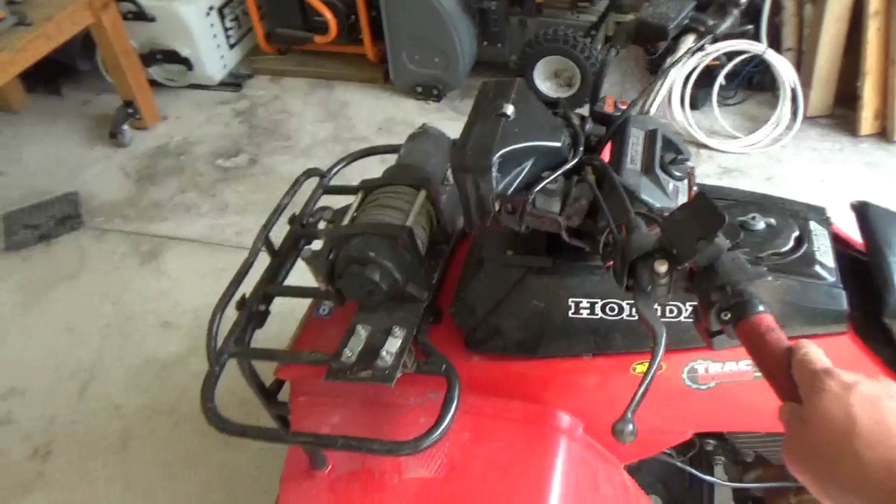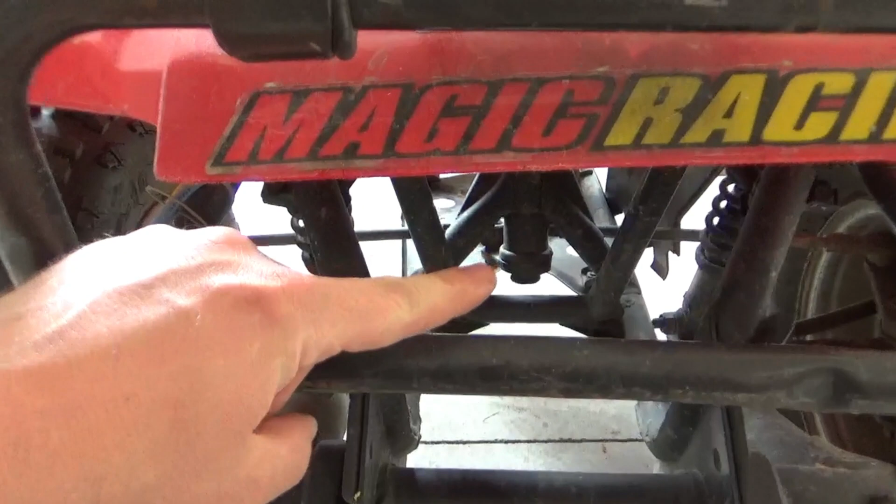Alright guys, we have a 1985 Honda TRX250 and it's got slop in the steering. Let me show you what I think it's coming from. Right there is the bottom of the steering column. If I wiggle the steering wheels for you, it seems to me like there's play in there.

The 1986 and newer show a traditional bearing in there. This 1985, the drawings I can find online, I don't know if it shows like a cone and cup bearing, but you can buy the balls for it. I'm hoping we can get this all out and find a bearing that would fit both those outside and inside dimensions. So let's get to work pulling it out.

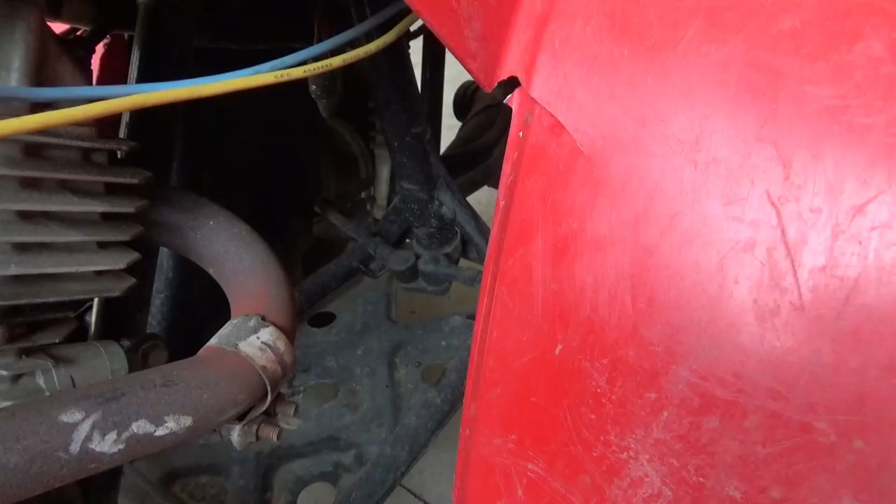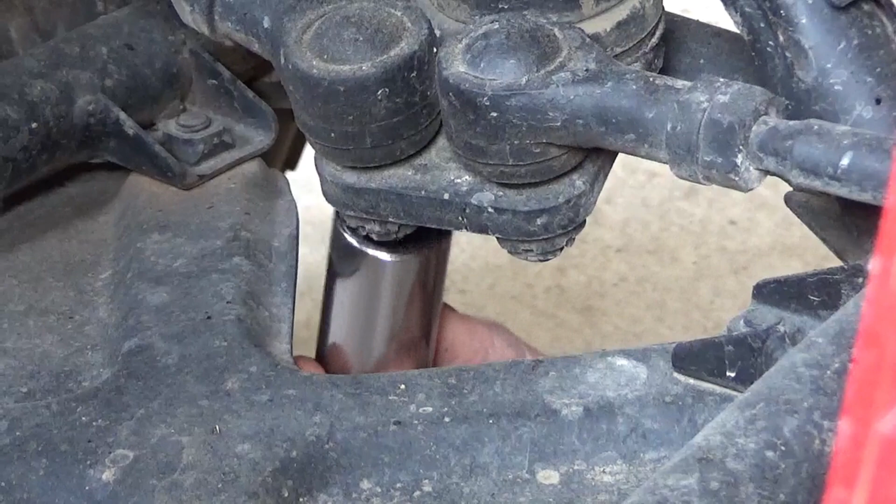Okay, I think we should start at the bottom and work our way up, and that starts with taking these, what do you call those things? Tie rods. They got a cotter pin in them. What size do you think those are? 12 millimeter? They are 17. Oh. Those are just spinning, aren't they? Try an impact.

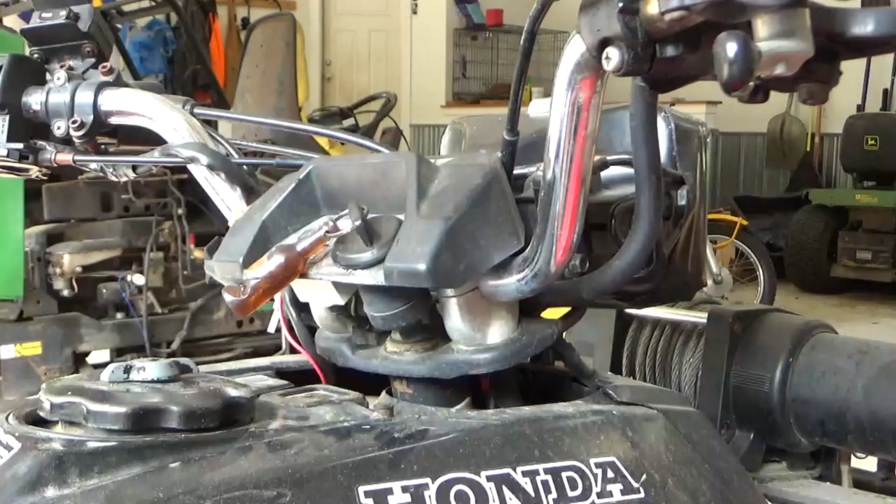Yeah, with those off now, I can feel the play in that. So I think we're heading in the right direction. Alright, so moving further up the steering column, we ultimately want to get to that castle nut there, so we got to take off the handlebars to get to that guy.

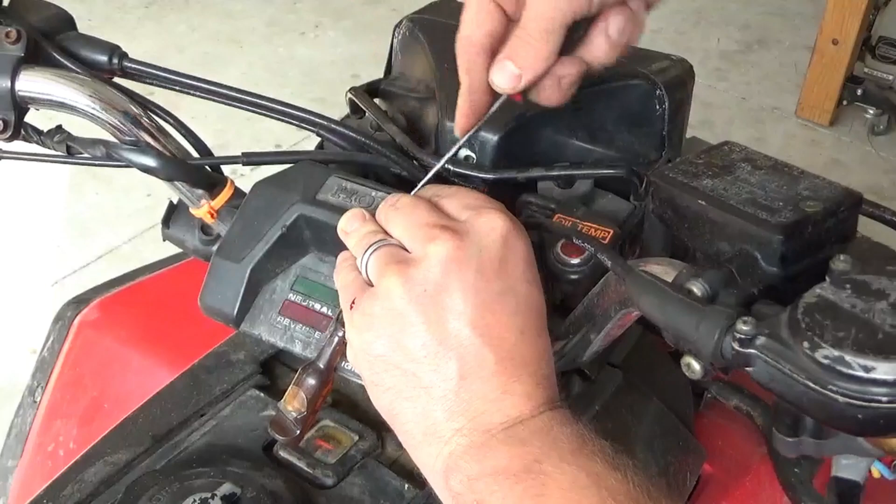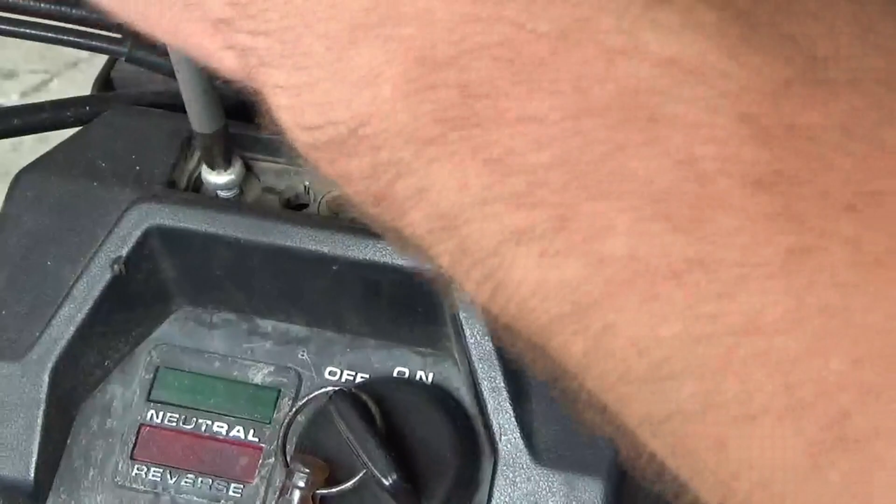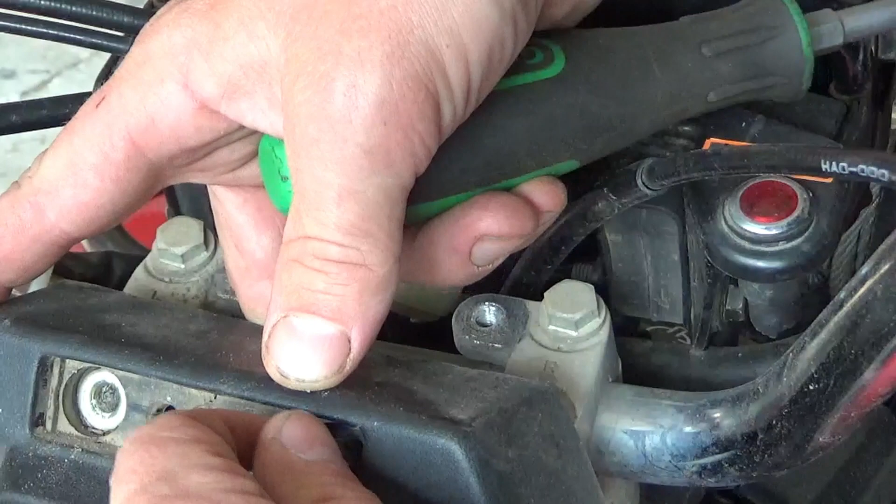And I think we got to get this dash off. I don't think it just pops off, it is attached. Let's see if this comes off. We got some JIS bolts. I'm thinking this, yep, there it goes, that whole dash will come out, which we don't have to disconnect any of these wires to the ignition switch or anything, we just want to get it out of the way. But we will take all this hardware with it so it doesn't disappear.

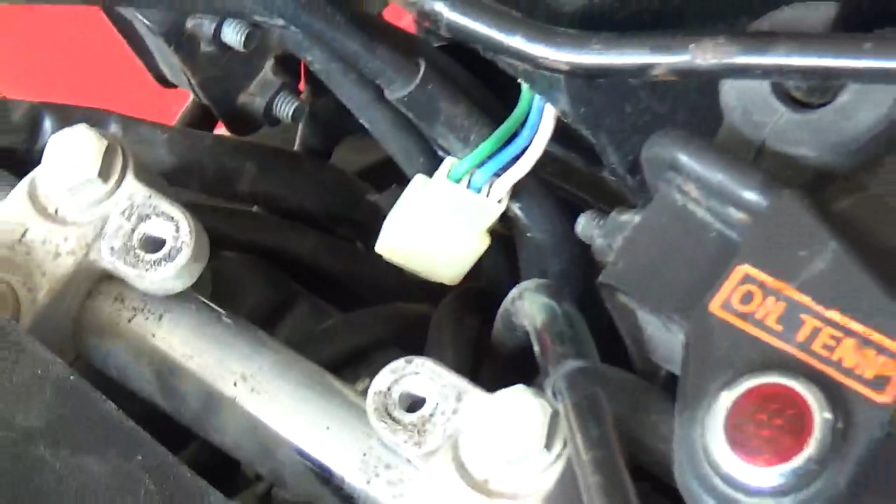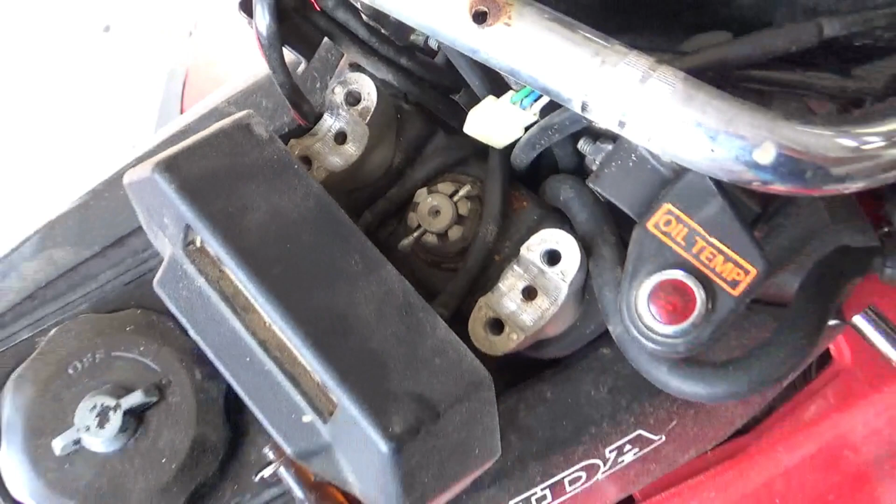And that's what we were after, is these. That'll allow us to take the handlebars off. Okay, again, we don't have to detach everything from the handlebars. We just want to be able to swing it out of the way, which we leave them forward like that. Right, gives us perfect access to that castle nut. And really, if there's nothing else holding onto that steering column, that should slide right out the bottom. So let's get that cotter pin out.

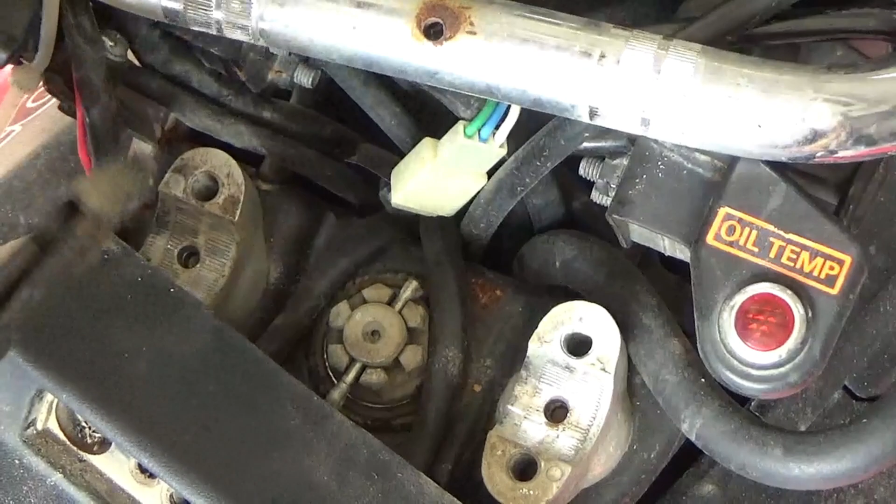Don't mind the screaming in the background. It's either a goat or the children playing.

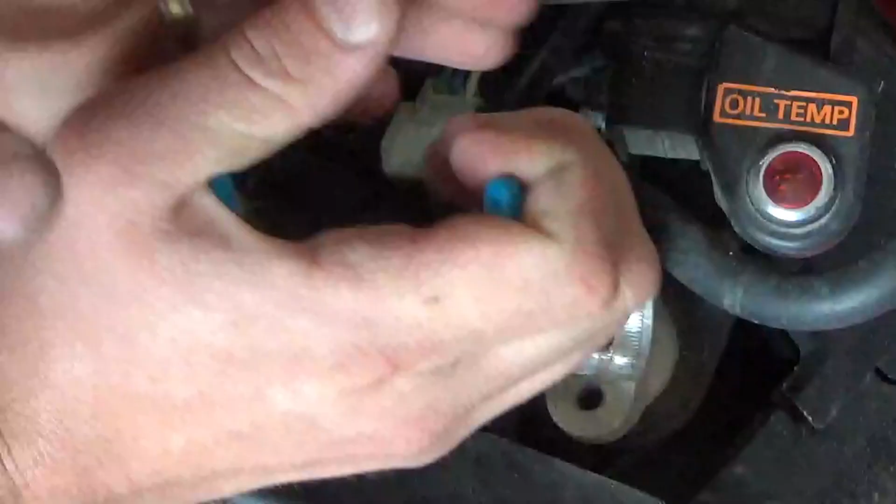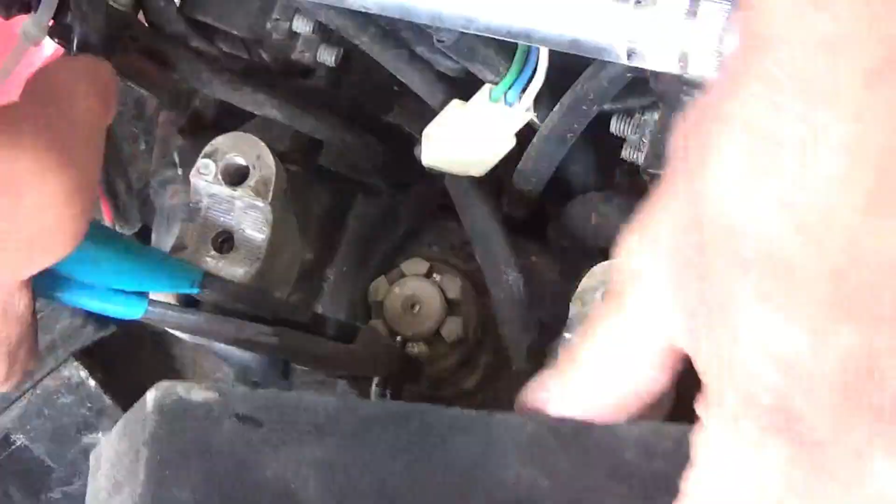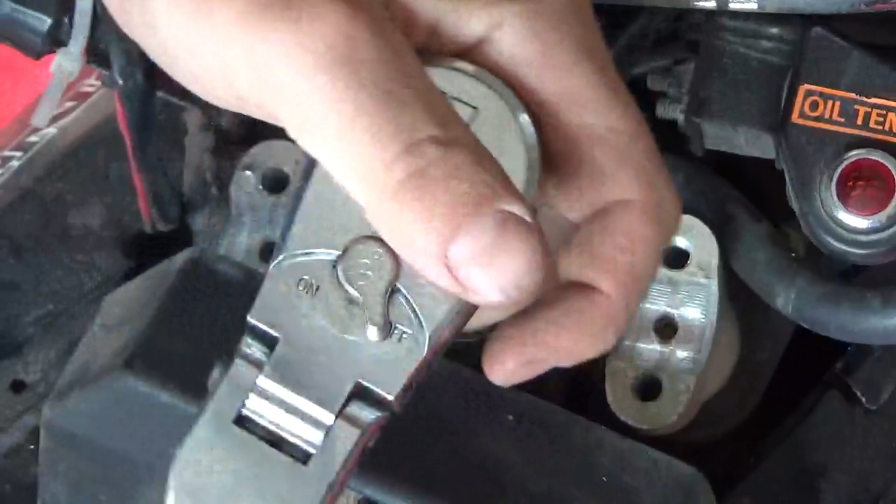Oh, come on. Come on, forget it. There you go. What size do you think that is? Big one? Well, if you guessed 24 millimeter, you are correct. Guess what? Oh, no, it's not. I thought it was spinning on us, but it's not. Look at that castle nut. Looks like there's a washer there too, but...

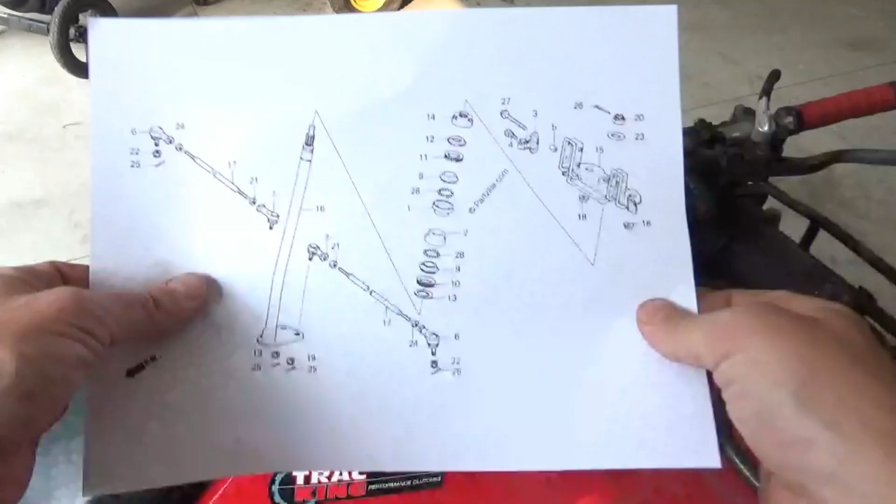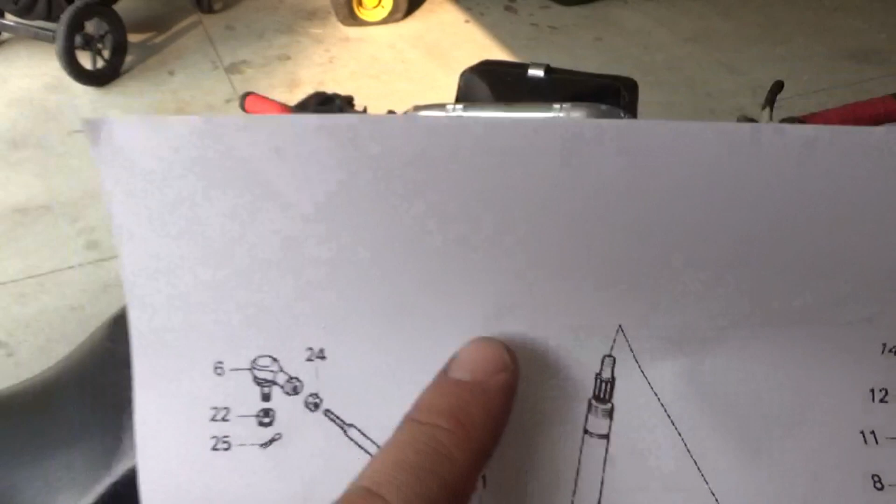Okay, so looking at the parts diagram, actually, I can see there is threads on there. That tooth part is what your carriage rides on. So that does have to pop off of there. And it looks like there is a locking nut on top as well. So deeper we go.

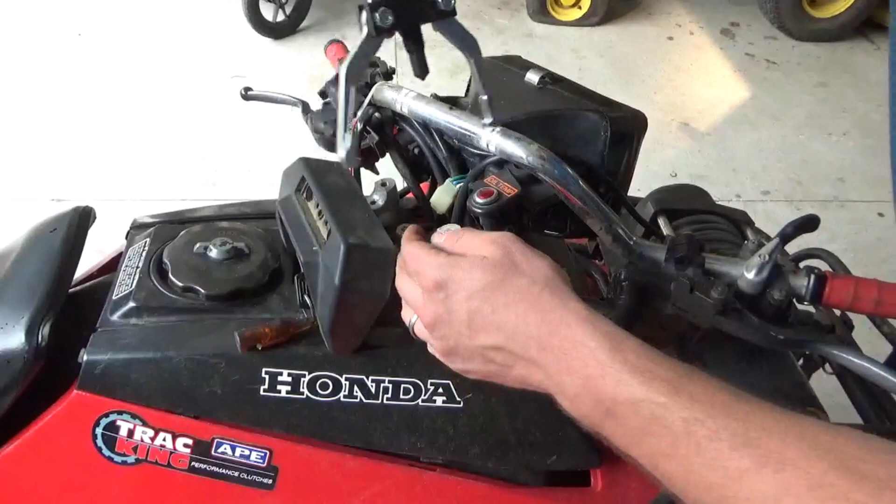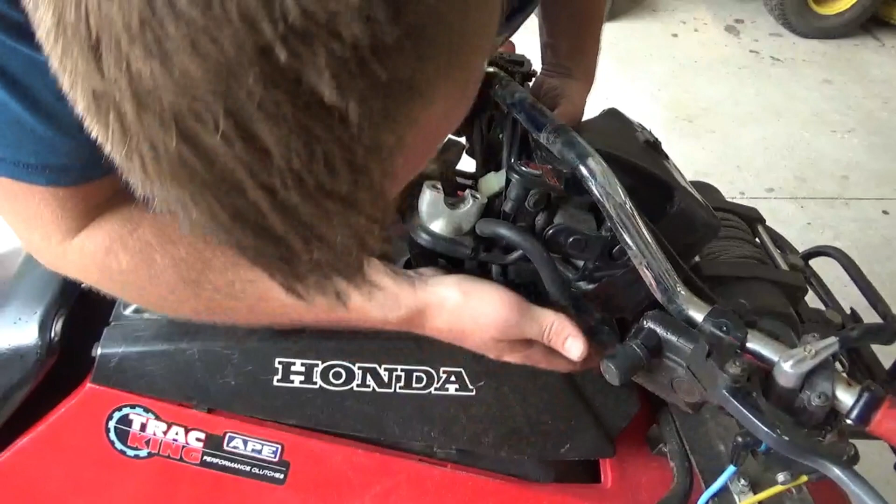Alright, so I finagled up a puller here. And if I can get one in the front and one in the back. I'll do that without pinching any cords, any wires. There. There's that little thrust washer that we were talking about. Can I get all this off to the side? Yeah. Nice. That wasn't too bad. I probably didn't even need the pullers for that.

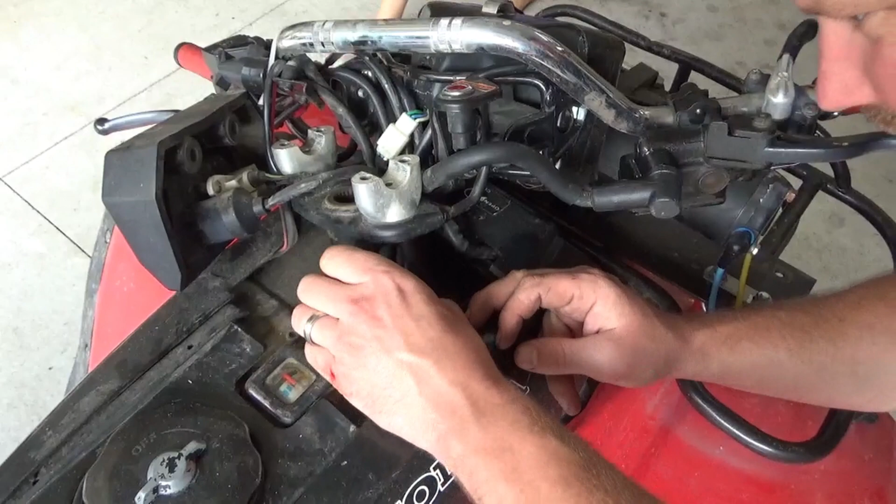Alright, now this. Is that turning? Oh yeah, that's turning off. Note to self, none of that was on very tightly. Probably because that bottom, oh, and there goes the steering column. That just dropped down in there. Let's see if it's catching on to that. Yeah.

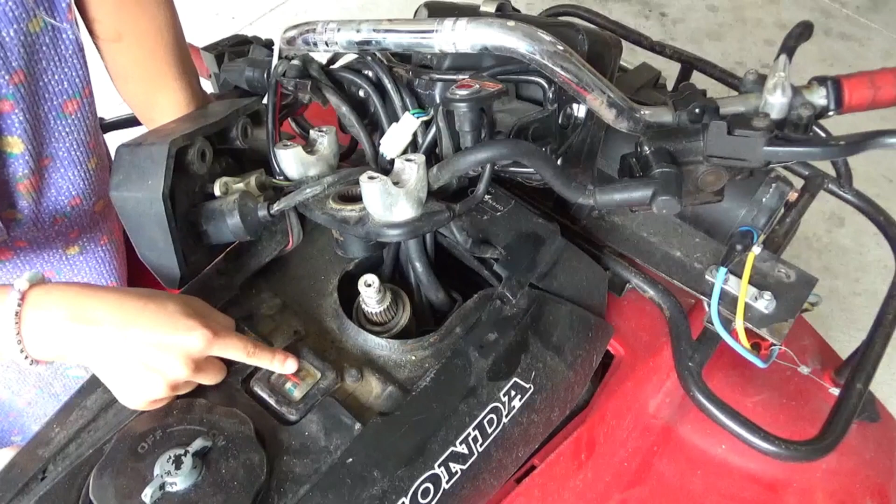Daddy? Yes, baby. What's this swervy thing right here? That's your gas tank.

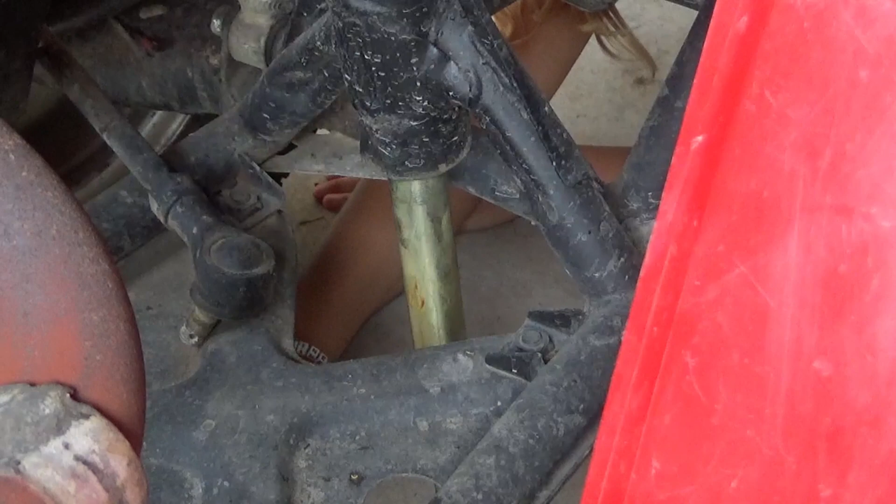We might have to jack up the front of this. Hey. Oh yeah, there's some balls. Oh, and there they all go. There's all the balls. I'll get them. I see them too. Goodness, they look like babies. Yeah, can you pick them all up? Sure. Well, we didn't lose any balls. Well, we lifted up this cup and we got them out. So there they is.

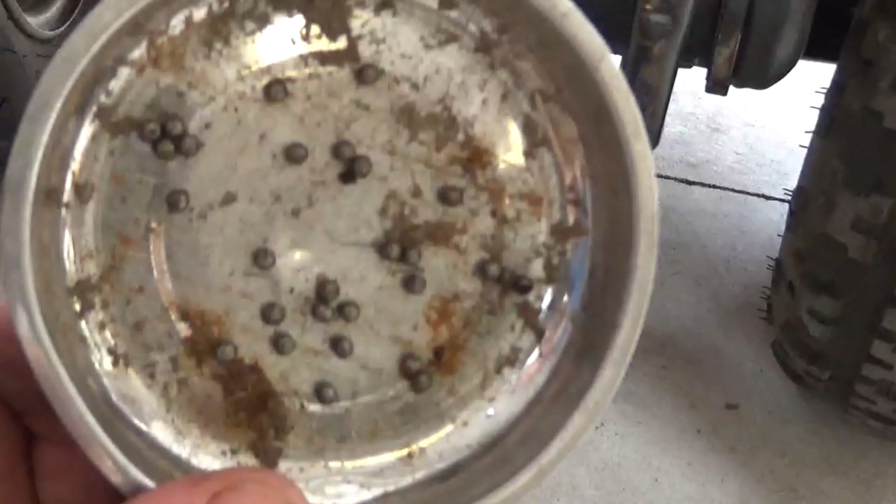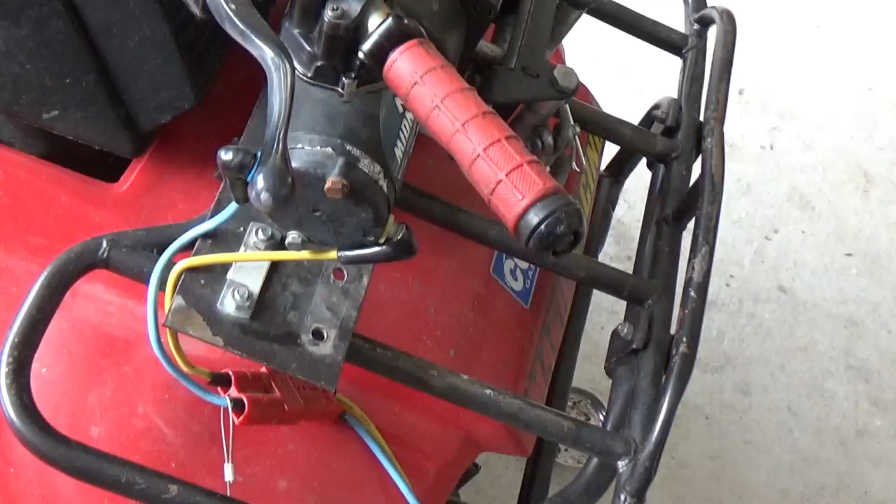I'm wondering if that looseness in the steering column, well, I mean, the grease is gone. I think the best thing to do is just pull that column all the way out and inspect those races to see if those are worn. Here's the top as well, so all those balls as well. And when I pulled this cup, I kept a couple of balls that stuck to it. So, yeah, let's jack up the quad and get that shaft out and inspect it.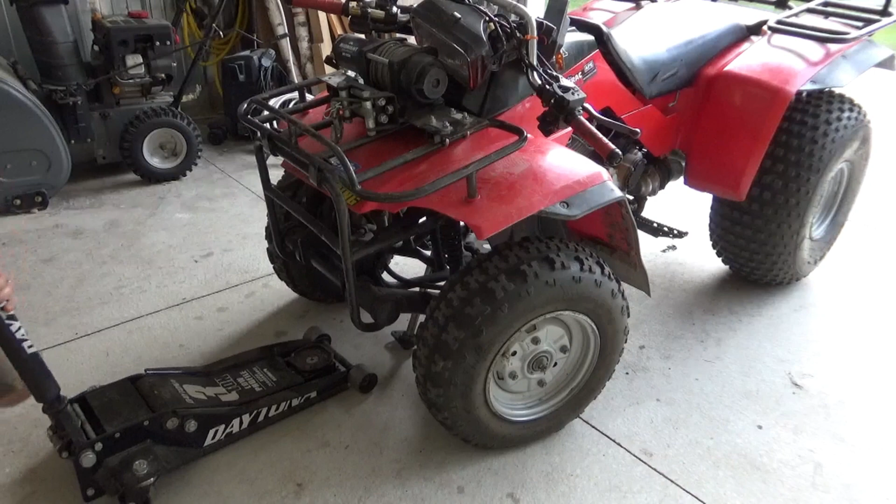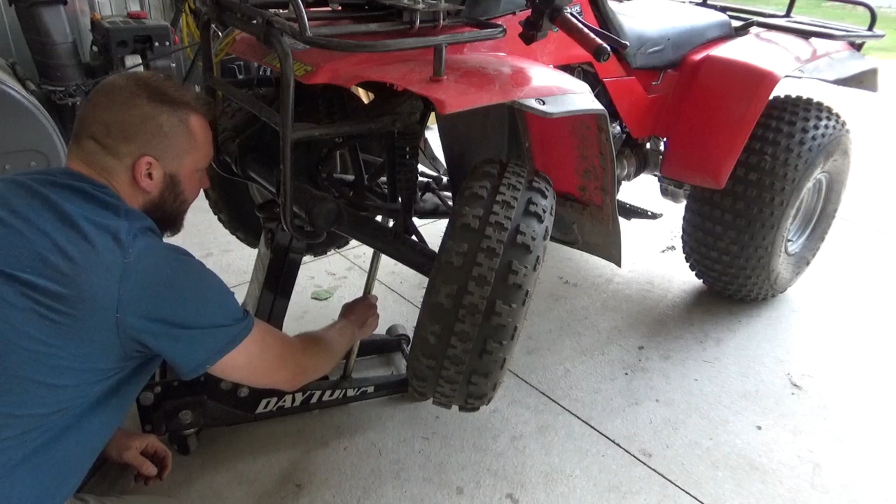I'll check. Ta-da! Put this down, Max, so no one gets killed. Yeah. Yeah.

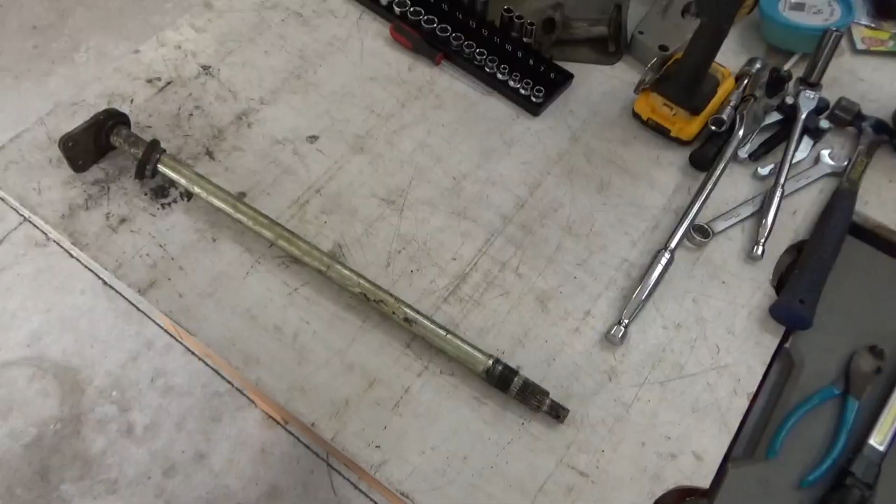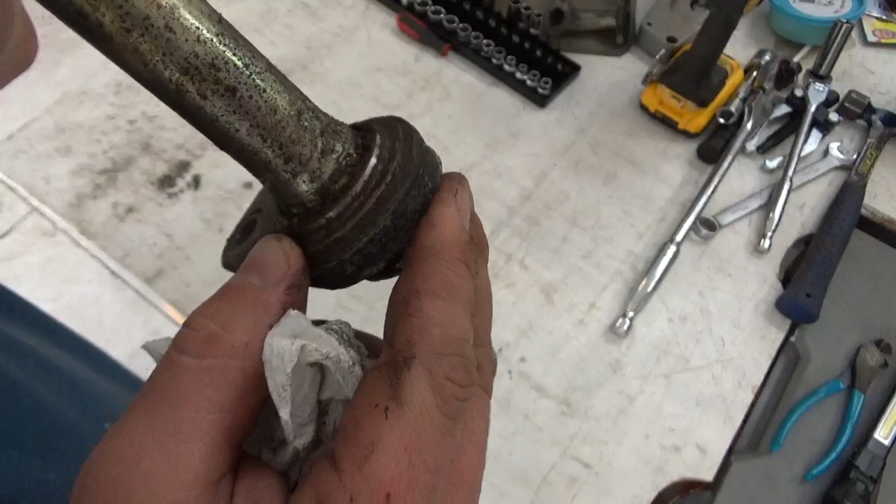Well, here's our shaft on the bench. They're wearing these cups. This one doesn't look bad in there. Yeah, how do you fix this back on? How? I mean, we can see the grease caked on there.

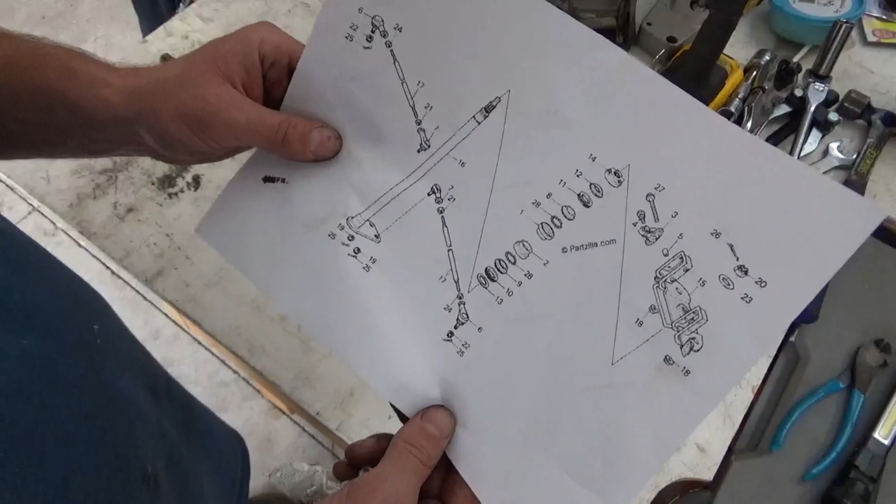Curious if we just look all this up, if these are still available, and just replace all of this so we know. I mean, these races and these balls cannot be that expensive. I wonder if that's the route we do. Let's look them up and see what we got.

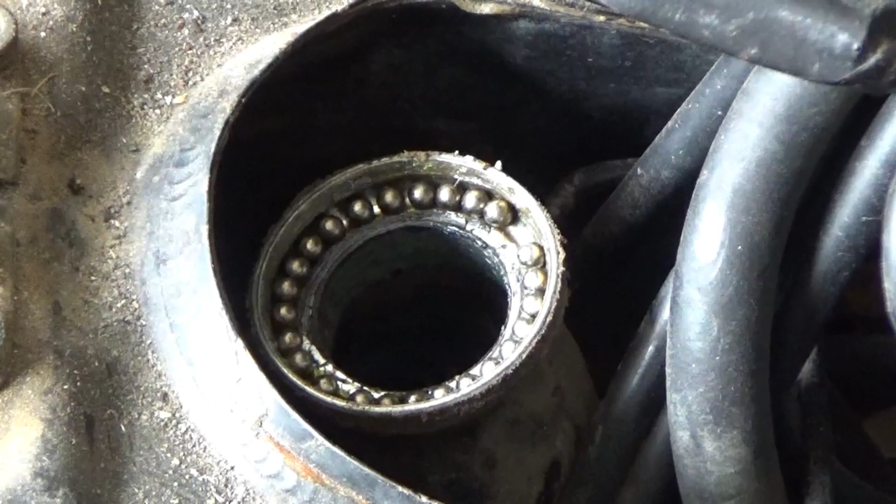So I guess before I go look for parts online, I should grab these balls out of here, because there's little children in the shop, and if those suckers get rolled away, we're gonna be in a hurry. So I got a greasy...

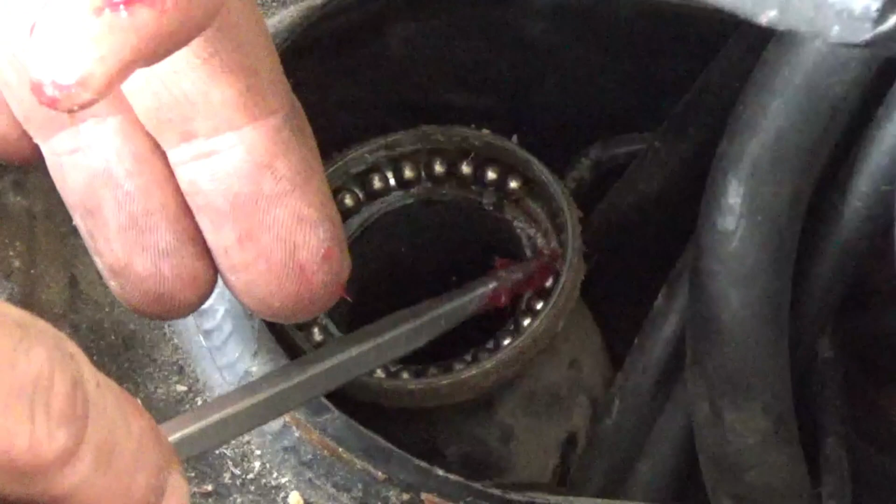Daddy? Yeah, bud. Can I tell you how we find it? Alright, so I'm using a grease on a flathead to grab these out. Why are you doing that stuff?

Okay, so got the old ball bearings. Got some new ones here. So these are supposed to be, the internet calls these out as 5/32nds. So I'm thinking let's clean these up and get some measurements off of them, and then see if they are worn.

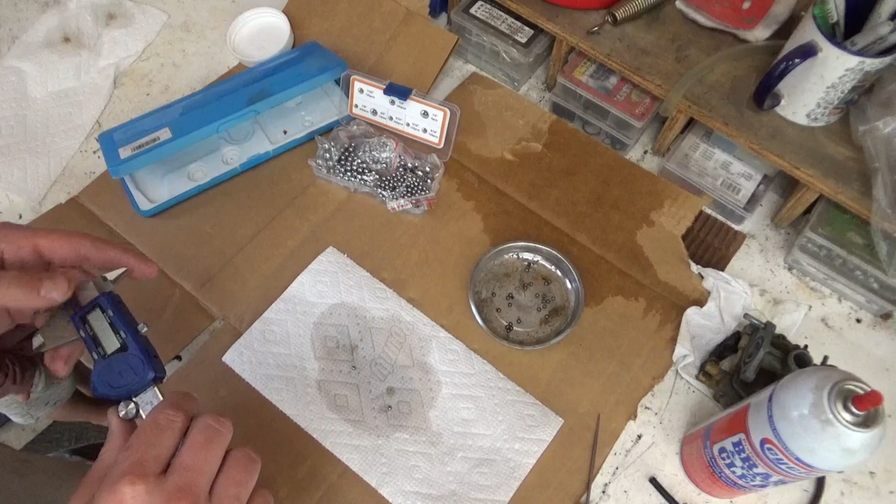Is that your measuring tool that you bought? Yep, it's my calipers. So real quick, what's 5/32nds? 5 divided by 32. It is 0.156. See what these come out to. 0.153. 0.152. Let's measure another one.

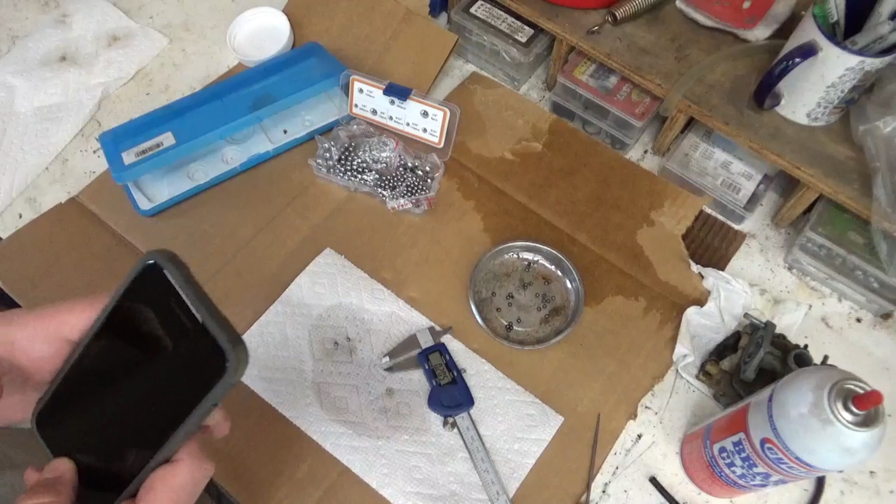0.152. I find it hard to believe that a Honda machine from 1985 uses the imperial system. What does 4mm come out to? 0.157 is what 4mm comes out to. So, according to that, we're off by almost 5 thou.

So if you're thinking about 5 thou, when you got a row of bearings around there, there's enough slop there to be 10 thou because there's a ring around it, right? Doesn't that make sense? So, what are these bad boys? Let's put these back so we don't get them mixed up.

What do these come out to? 155. So these must be our 5/32nds. Alright, so these are going to be the ones that we want. Got the right bag the first time. I got this cheap set from Amazon. I'm sure I'll never use the rest of them.

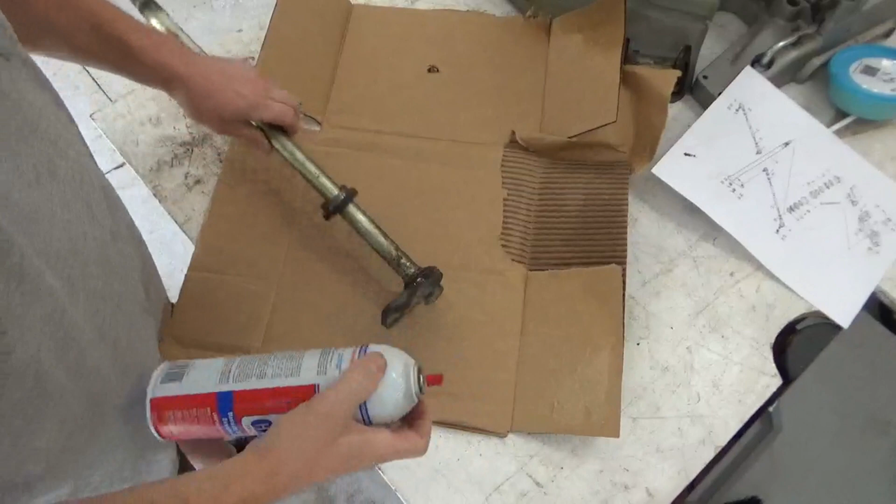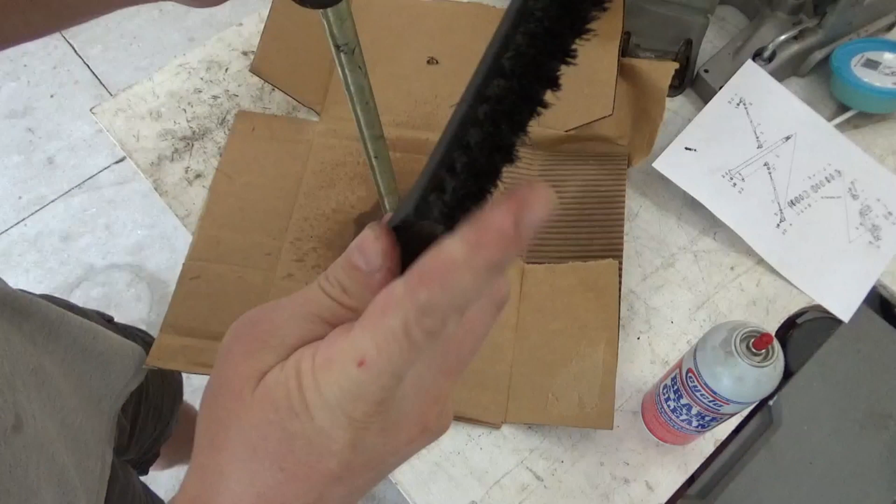Okay, let's go load this back up. Before we grease this back up and load it in there, let's clean up some of this old crusty grease. I just have a soft nylon brush that's not going to scratch anything. Everett, could you bring me some paper towel, please? Yeah.

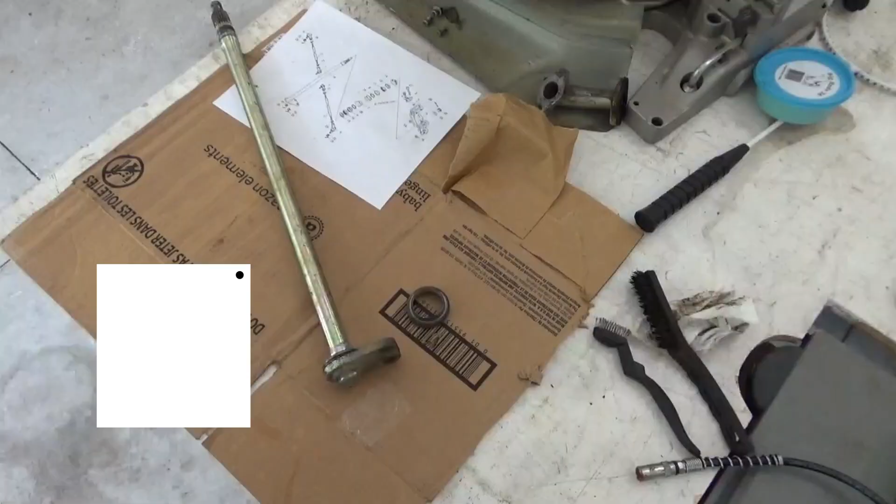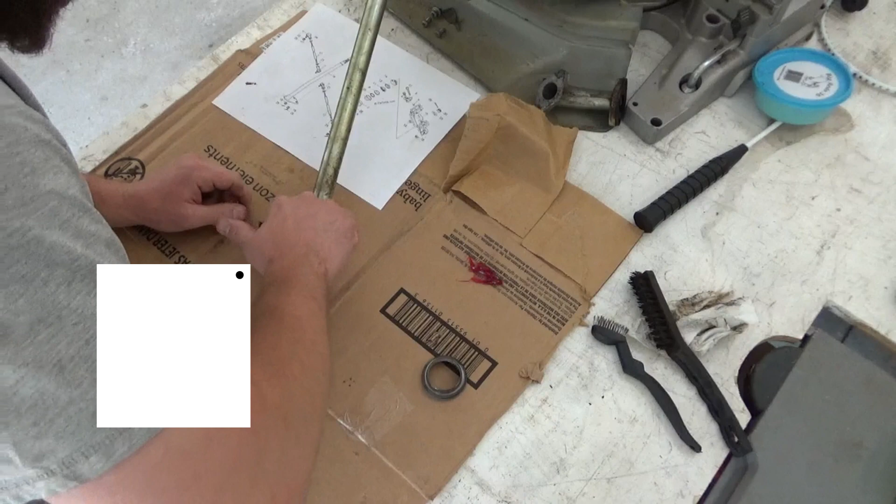Alright, I got those relatively cleaned up. Let's get a glob of grease. How do we want to do this? Let's get some grease on the race, and then we can go about placing them on there and then putting our cup on top.

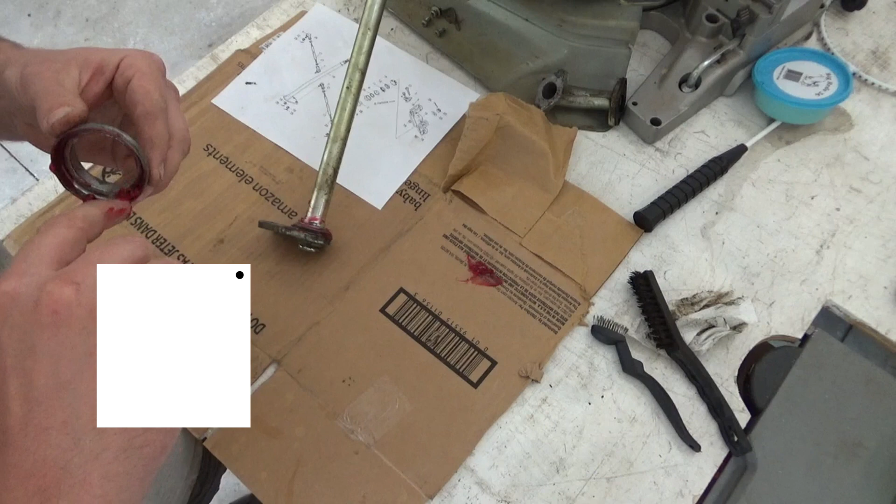I counted 28 ball bearings for the top and the bottom. We'll place them in there until we run out of room and see how many that is. I doubt that we lost any, but if we got 28 for top and bottom, we'll see what we come out to.

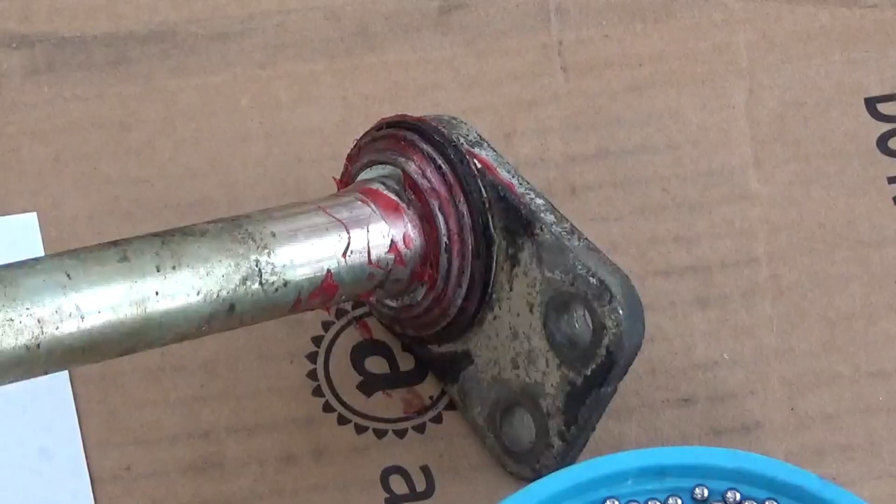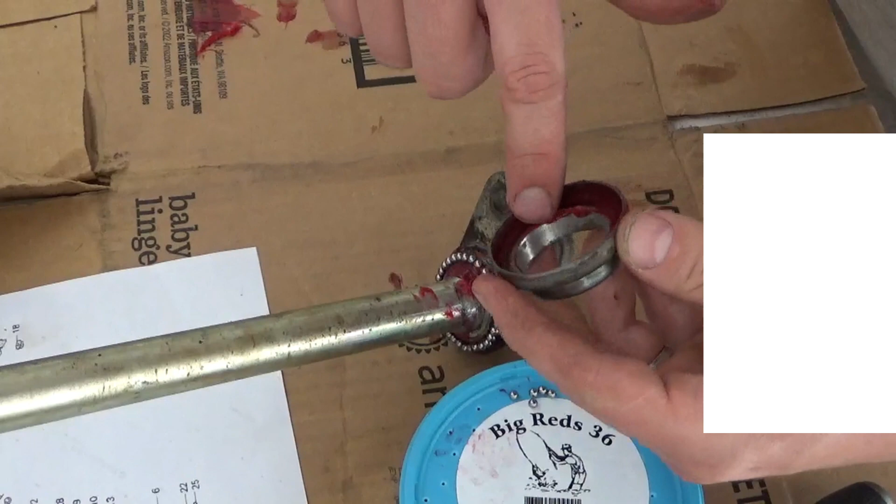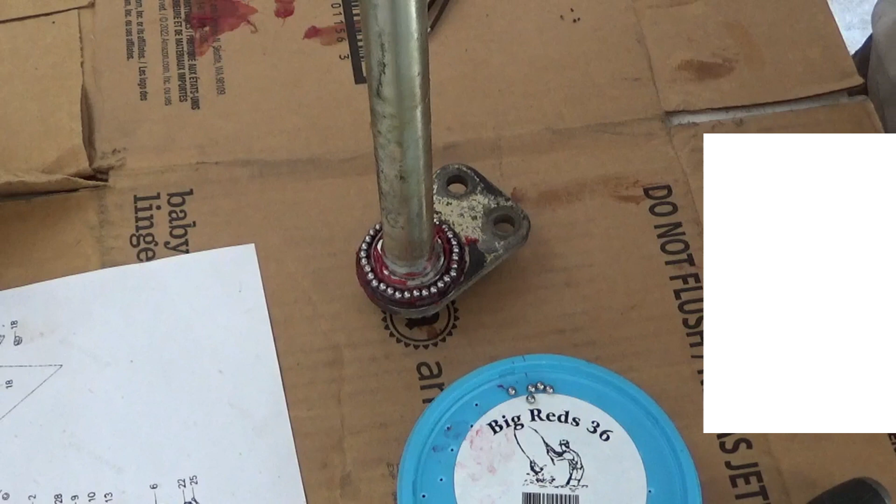There she is with all the bearings stuck on with grease. I'm just going to take a little grease, put it inside the race, or I say race, it's probably called a cup. I'm sure the internet will tell me what it's properly called. So let's slide down this race and get that all captured in there. Just like that.

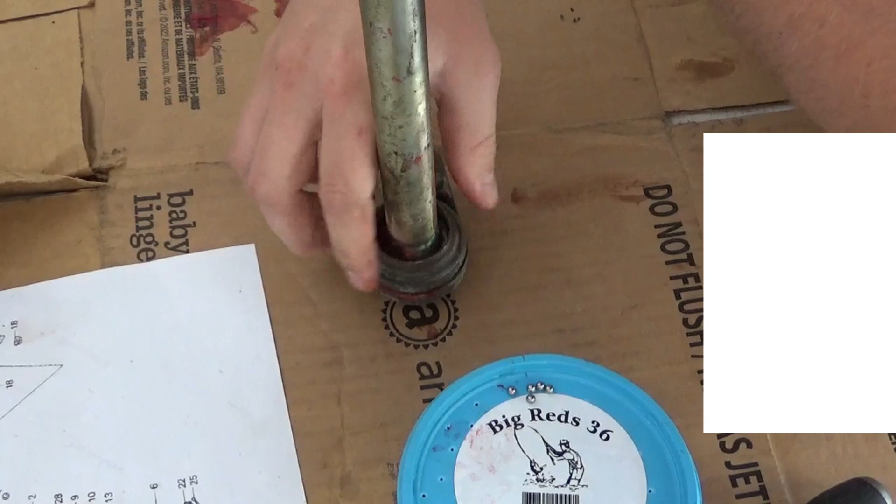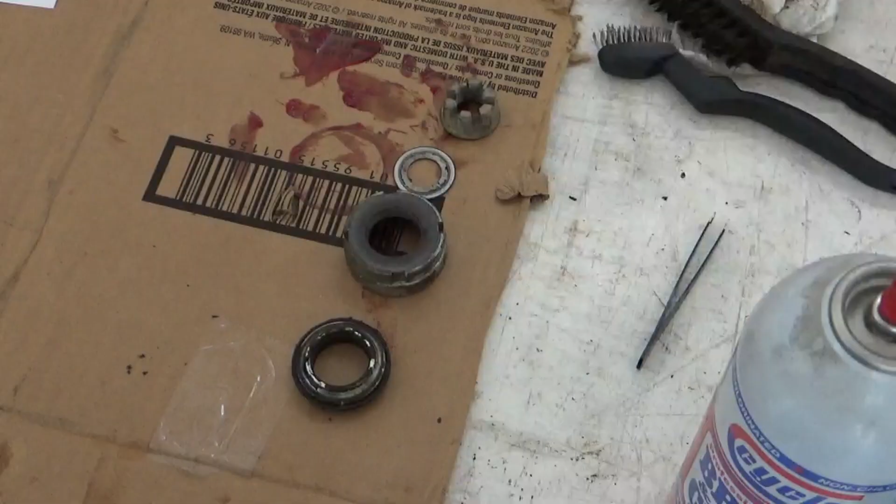Now we're ready to jack up the quad again and start reassembling this thing. I guess before we race into shoving that steering shaft back in, it would behoove us to clean up the top bearing, so that's all ready to go. Get some fresh grease on that, and then probably clean up that collar back on the quad and put bearings in there.

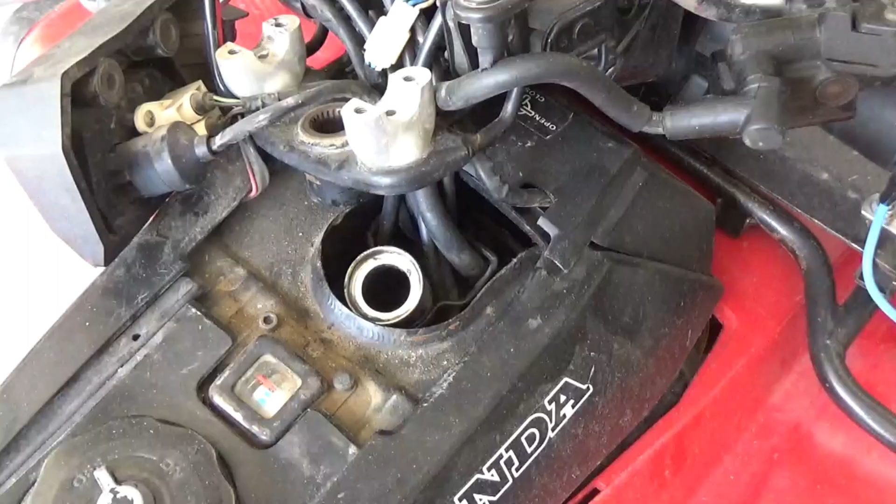Here's the cup that's back on the quad. This is relatively clean. I think we can put new grease in there and stack that full of ball bearings as well. So when we jack up the quad and put the steering shaft in, then we can just slap down the top race and the bolt, and we're ready to tighten it right up.

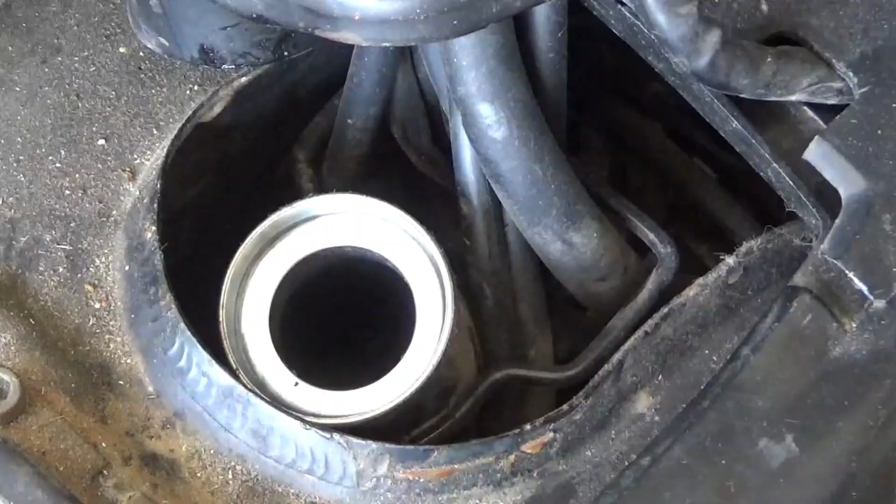My theory is more grease, more chance of it holding on to those balls better, right? Is it? Are you smelling what I'm stepping in?

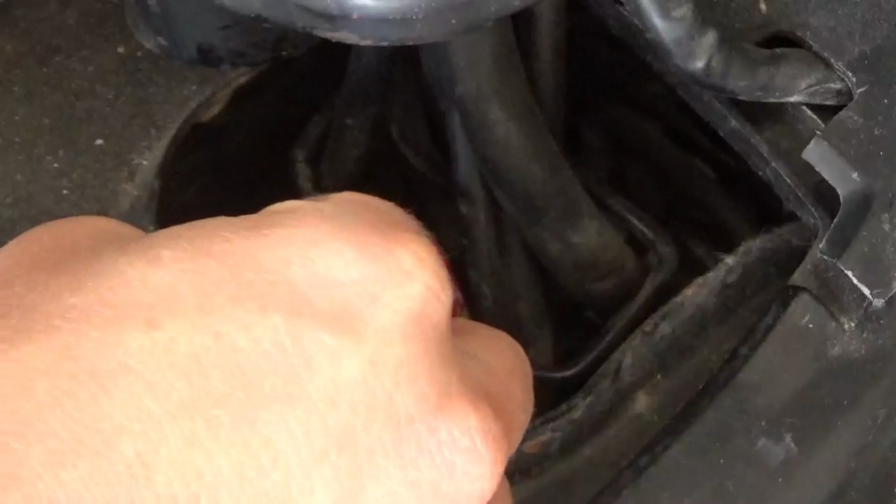You guys ever see the show The Reassembler with James May? I think it was on Netflix. Now this might be a long time ago, but it was called The Reassembler. What they would do is take something mechanical apart, and then James May, you would know him from Top Gear, would put it back together.

Part of that show was an old school mini bike. And I remember on that mini bike, it had a steering column just like this. James May would count out all his balls and put them in the grease. I remember seeing that thinking, man, that'd be really cool to do that. And now, look at me now, James May. I didn't think I'd be working on stuff this old that I'd be doing this with.

With this top cup, this will be easier to count how many balls we're fitting in there. Remember, we had 28 originally.

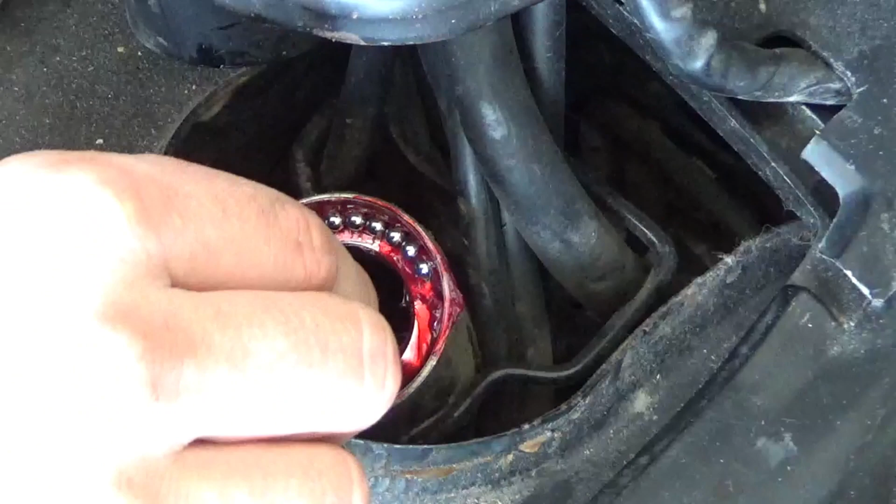Because these are a little bigger, are we going to fit less, or were all those original bearings worn out so much? Anyone know the original number? On the website, they want you to order 60 of them, which to me would mean 30 for the top and 30 for the bottom. So let's fill this all the way up, and then we can count them.

We think, can we get one more? Yeah, I think we can safely get one more. Oh. One, two, three, four, five, six, seven, 8, 9, 10... 25, 26, 27, 28. 28. 28 is the magic number.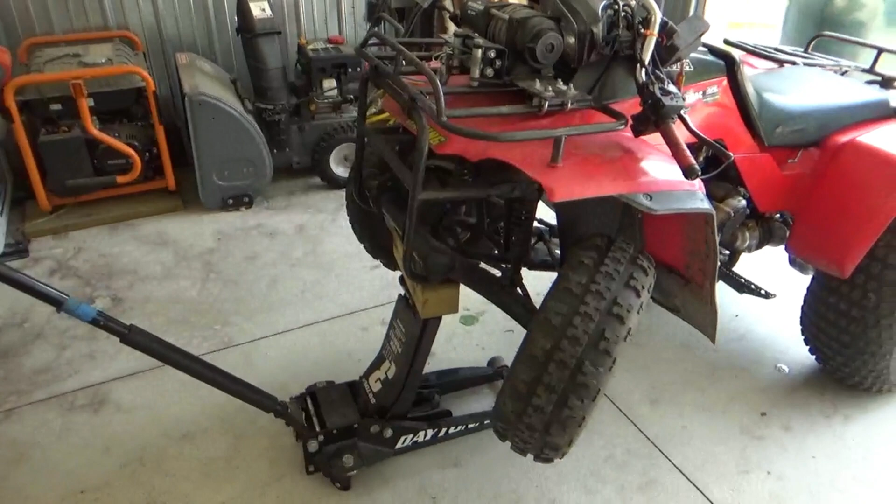He who does not use jack stand, become jack stand. Oh, this is so sketchy. What do you mean it's so sketchy? Let's let it down a little bit.

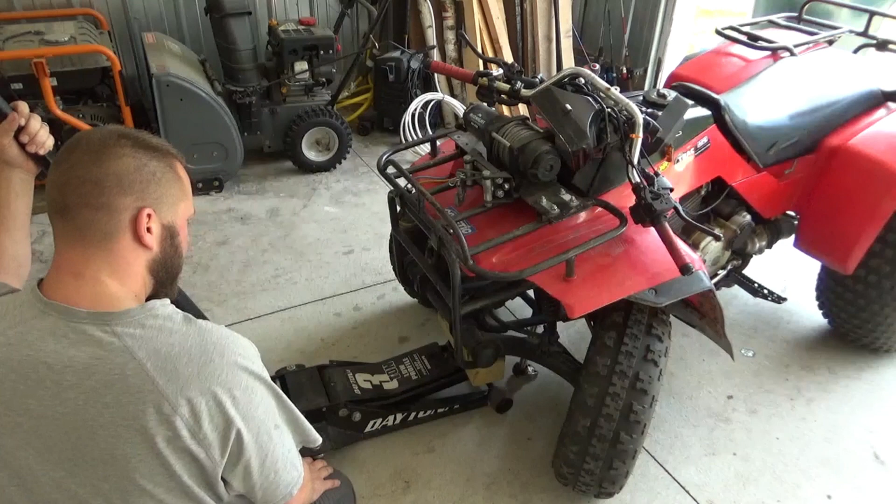Daddy, my hope is when you let it down, it doesn't roll down the hill. Daddy, my hope is when you roll it down, it doesn't go rolling down the hill. I hope it doesn't roll down the hill either, Everett. And that would be bad because your car's in the way. Bam, bam, boost, boost. All smashed up. Collins.

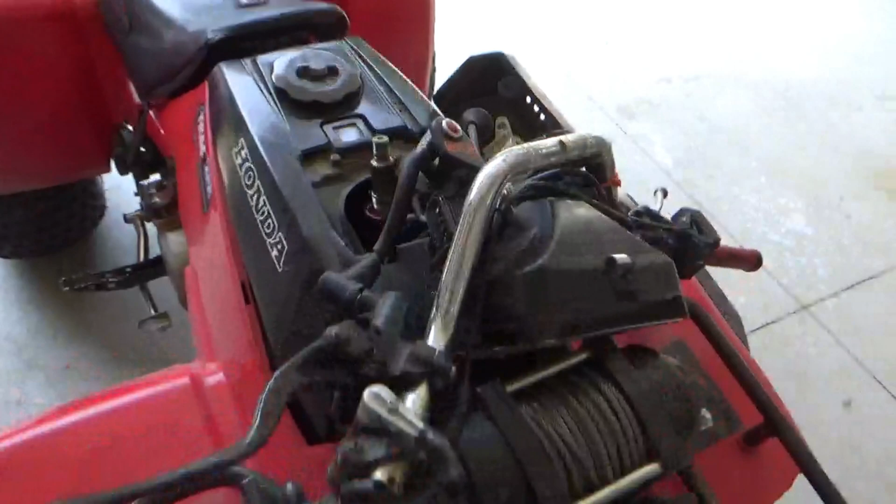Success! Okay, so after a little fumbling around, I'll show you my setup. We're propping that steering shaft up with a large socket on this jack. And that's keeping it up against the shaft there. So that will give us something to push against when we're setting our stuff on top. Okay, put our top race on. Our first nut.

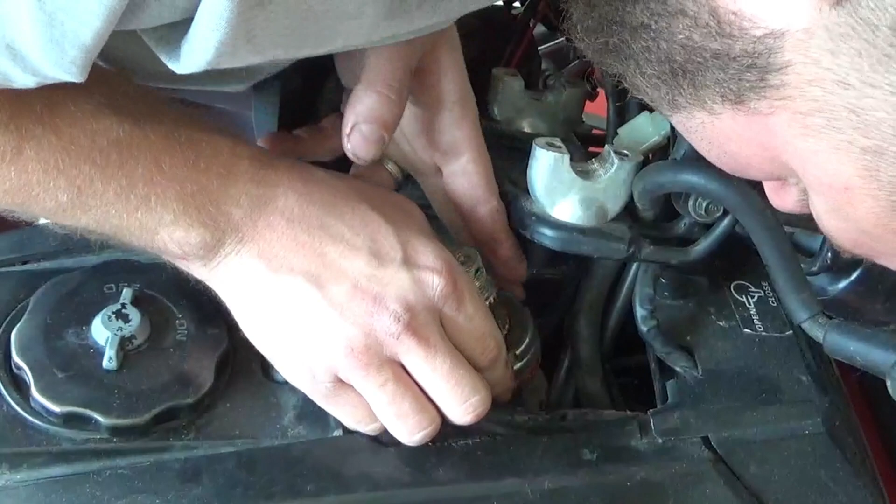There it goes. It's a really fine thread. Now I'm starting to wonder if those bearings had enough play in them that's what was causing the play in the steering. But I'm quite convinced now that this nut had loosened up, and that's what allowed those bearing races to back away enough to where you had so much play in them.

I don't have a spanner wrench for this, so we're gonna have to hammer and chisel it to tighten it. You guys know what the torque spec is with a hammer and chisel? Yeah, me neither.

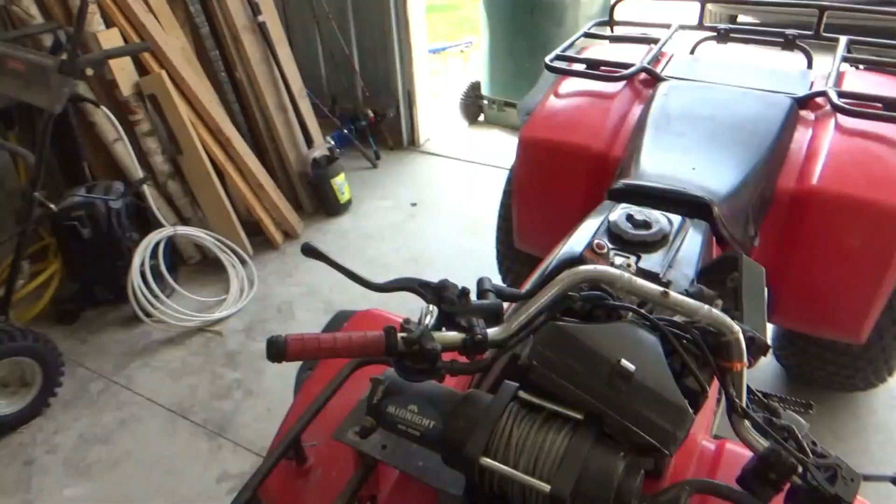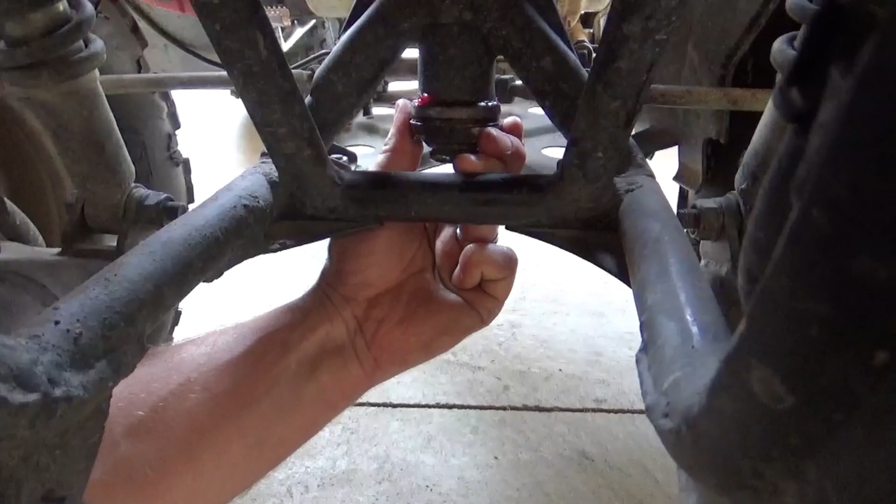Alright, I want to show you before we go any further. Oh, can I hold the camera and do this at the same time? There's no more play in that from side to side, so whether it was the bearings or that top nut was loose, that was our solution for this. So let's finish slapping this back together.

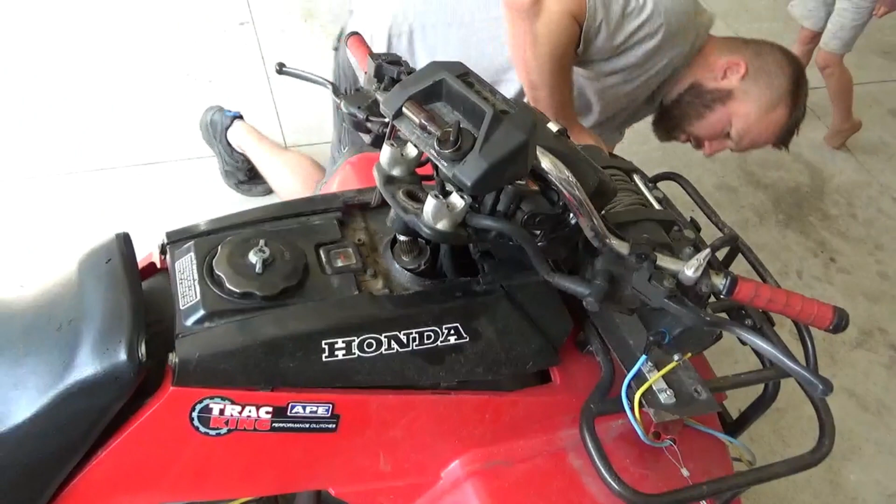This guy should go back on next. I want to make sure that's straight to the front. That looks pretty straight. So when we put this on straight, we're not going to have crooked handlebars. That would suck to come back and have to do that again. Okay. That's straight. Let me double check that. It's straight down here.

I think it's off to the side a little. Let's see if I can go one. See if I could just move it over one tooth. Okay, that's straight. And that's straight down on the bottom, so I'm happy with that. Put on our thrust bearing, also known as a washer. That's tightened down.

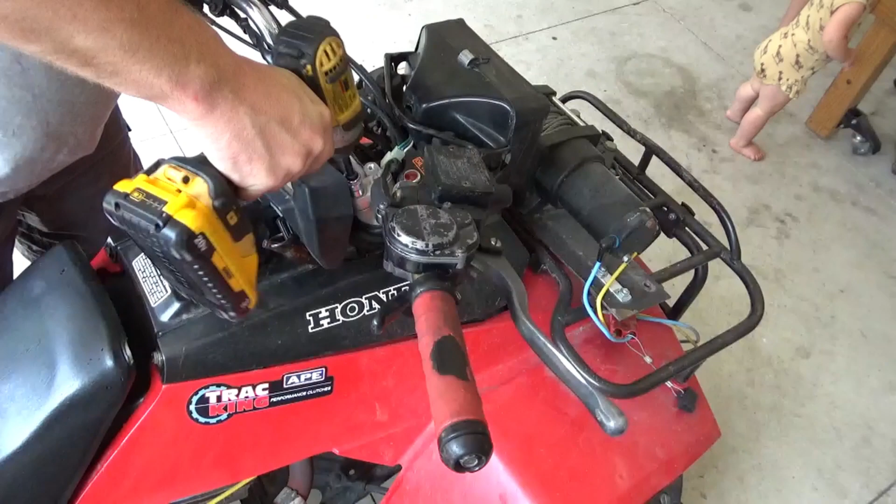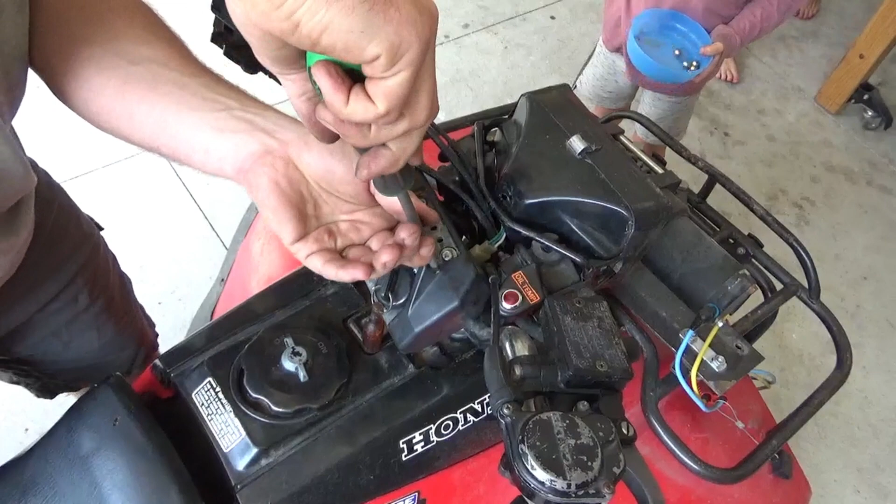Daddy, where do you want me to put the O in there? Alright, let's put this guy back on. I'm pretty sure my most used word in my YouTube videos is alright. That's alright. Slap that Honda label back on. Alright, there's the alrights again.

Well, this seems like a good spot to stop the video so we can move on to the tie rods next, and then we'll probably have to adjust the toe on these front tires and get them all squared up. There's other issues with this quad. The customer doesn't know if he wants us to move forward with those things yet, but that's how we fix the bearings and tighten it up on this steering column.